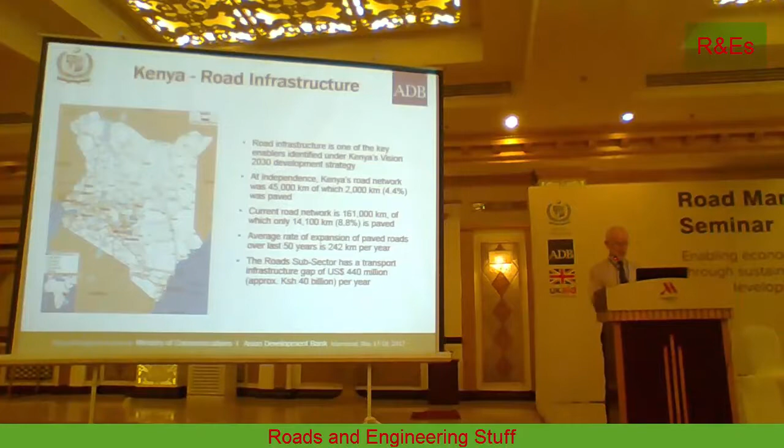When the current government came in, what's called the Jubilee government, its manifesto promised that they would provide an additional 10,000 kilometres of surface road in Kenya. Fair enough.

But the problems: 3 road agencies, they know where they are now, but they're having a devolution agenda, and they want to devolve the power to the districts, the regions and the districts. So the 3 roads authorities don't know their future, but they're having to implement long-term asset management planning. There's no maintenance standards. The emphasis is on projects. Let's not do maintenance, but let's do the projects to reconstruct the road.

Now, you'll see, a lot of this should ring with you about what happens here in Pakistan. What I've seen is no different.

Outturn costs are 50% higher than the engineer's estimate, and it was so bad that each year they would budget on the engineer's estimates, they put out the number of contracts to use up all the budget to find out the budget's overrun by 50%. Each project's overrun by 50%. So half the projects they wouldn't pay for this year and delayed the payment until next year. The next year they did the same thing until now there's a 6-year backlog in paying contractors. So contractors are already priced in the cost of borrowing for 6 years in each of the bids.

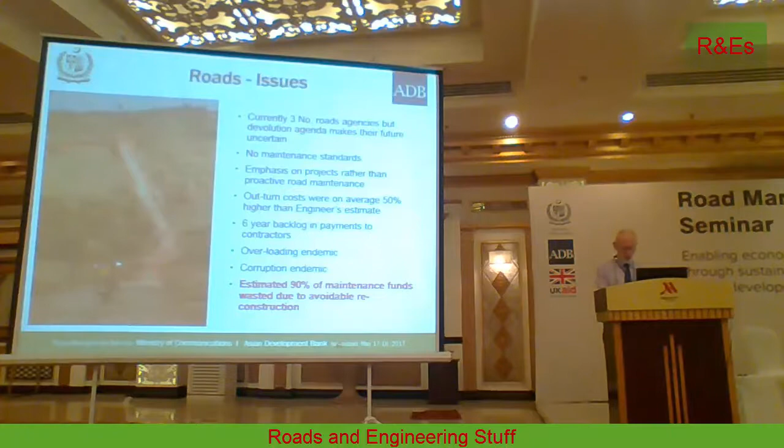So, we looked at, luckily in Kenya, we had 2 sets of data, 5 years apart, a few years ago. So we're able to look at what the asset value was, asset condition asset value was on the first year, and then look at it what it was in the fifth year and put a trend. And what became obvious, that because they're not doing maintenance, the asset was decaying at 6% per year.

I remember saying yesterday, the World Bank says you can link 1% investment in infrastructure to growth to GDP. So by the time you add in the cost of that 6% per year, plus the 6% lack of growth in GDP, the economic cost to Kenya of not doing road maintenance was 270 billion shillings a year, and 1 shilling is about 1 rupee. So it's a vast amount of money being wasted.

Public debt was 55%. So whilst the Jubilee Manifesto said we want to create 10,000 new roads, Kenyan government could not borrow money. IMF would not allow it to borrow any more money. So how are we going to reconstruct 10,000 kilometres road and with no council funds?

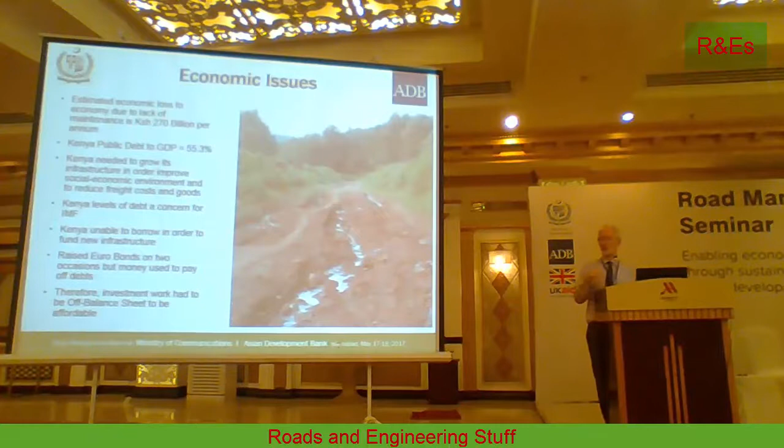So it was called the Kenya Roads Annuity PPP Programme. Forget about the word annuity, it's something we were handed with, it means nothing. The objectives were 10,000 kilometres of surfaced road over 3 years.

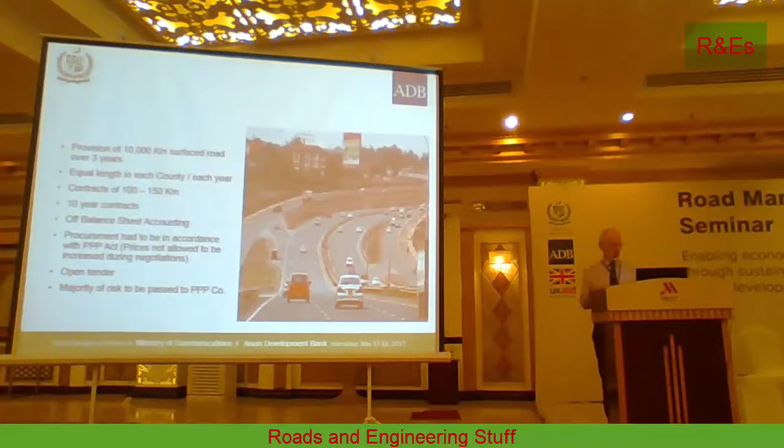Then the politicians got involved. They wanted an equal amount of road and an equal amount of money spent in each county each year. So we ended up with 4,000 kilometres being done each year, split into something like 30 lots, each tendered as a PPP separately. 10-year contracts - we wanted 17 to 20-year contracts, but the Treasury in Kenya felt the local banking market wasn't used to lending money for more than 10 years. The Procurement Act had to be followed, the open tender, and the majority of risk was passed.

So, reconstruction. These are the objectives we wanted out of the project: implementation affordable and sustainable, in other words we get the roads into a state where we can easily invest to match depreciation, and proactive management of overloading.

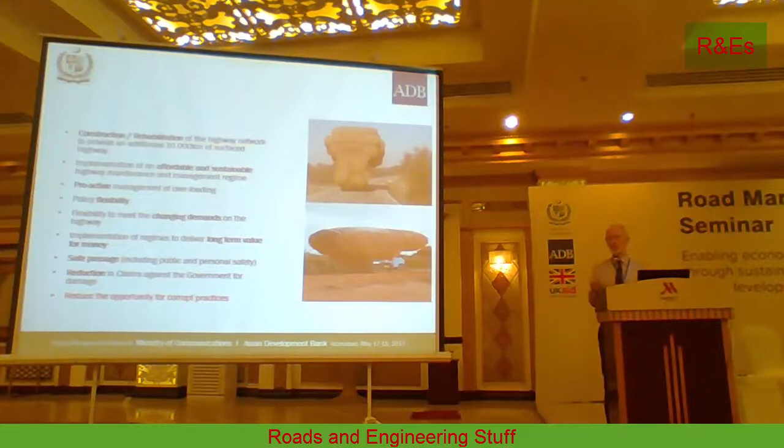We actually passed the overloading problem on to the contractors. And as Ian said earlier, it's not difficult - you tell what the amount of overloading is and the price point. Policy flexibility to meet changing demands of the highway, long-term value for money, safe passage, reduction of claims against them. And the subtext was the government wanted to remove all the opportunities for corrupt practices. That was why it went down the PPP route, because in PPP there is no supervision, it's self-supervised.

But there are other issues: policy flexibility, political control - the politicians wanted to be involved in everything. Strategic dominance - what the local market was scared of was international contractors coming in and taking over. But you have to remind them, there are no international contractors out there sitting with 10,000 staff doing nothing - they wouldn't be in business.

What you tend to find with international contractors is they bring in a management unit and then manage the local supply chain to deliver the project, and that's actually more work for the local industry than what they were seeing. There's long-term commitment, which can be good or bad depending how well you get on with your contractor. Then there's value for money, corporate governance, institutional weaknesses - there's no capacity inside the Kenyan government to do PPP, and capacity of local markets.

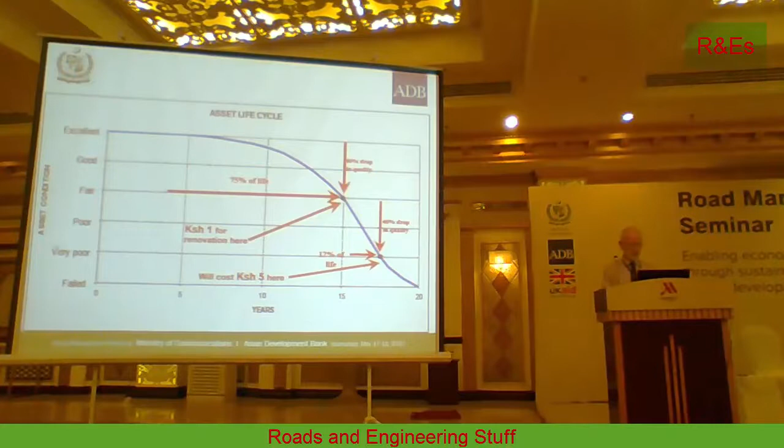If you look at it on a different scale, traditionally you let it decay 20%, you reinvest, and let it decay 20% again. But most roads authorities let the roads decay to the point of failure, and because it's a 1 to 5 ratio, when they try to invest the same amount of money as before, the recovery is only a fifth - so it's a never-decreasing circle. What this shows is to move to steady state, you need to change not only the way you procure, but how you deliver maintenance. It's a total change - just throwing money at it doesn't help.

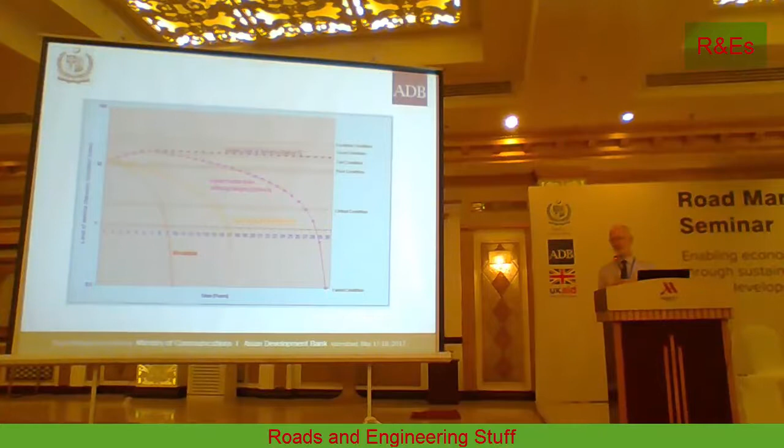Now, PPP and performance-based contracting is about delivering a level of service. So you've got to decide what your level of service is. And this is a question for you: do you want that? And that's not Pakistan.

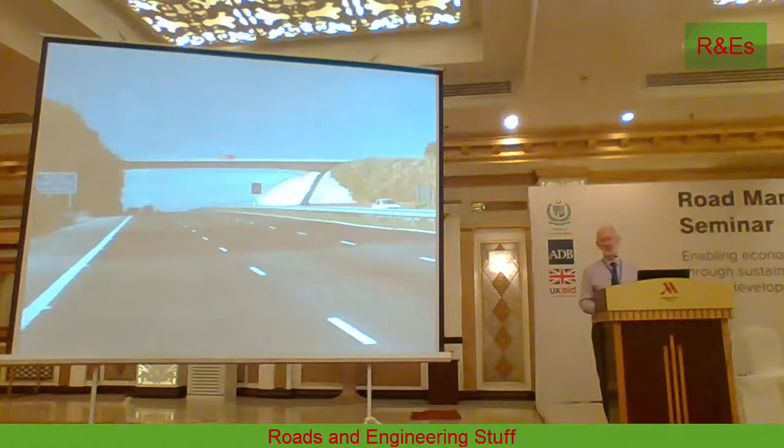Or do you want that? Who wants what? Who wants the first? No. And who wants the second? Somebody's brave enough to say that's what we like - that's what I have in my office in the UK. But neither is true. The first one is unacceptable. The second one is unaffordable. You have to find something in between.

So how do you determine the level of service? First of all, you've got to have a mechanism. What we did, we take 3 factors - there are 3 project objectives. One is about asset management, one is about safety, and one is about the visual condition.

These are all measurable. So we take, for example, SCI, Structural Condition Index. We take pavement strength and divide it into 6 bands, from excellent down to failed. Then we look at skid resistance and accidents - there's a relationship between wet weather accidents and skidding. So we do SCRIM as a normal survey that we do, and again divide it into 6 bands, excellent down to failed.

PCI, surface condition - we do visual surveys every year that pick up potholes, trips and all the rest of it, and scope it. So now we have 3 things, we add them together to get the pavement network condition index, the NCI, going from 30 down to 0.6. It's not linear, it's a curve. And the important thing is, it doesn't matter whether you agree with the philosophy or not, as long as you do it the same way every year.

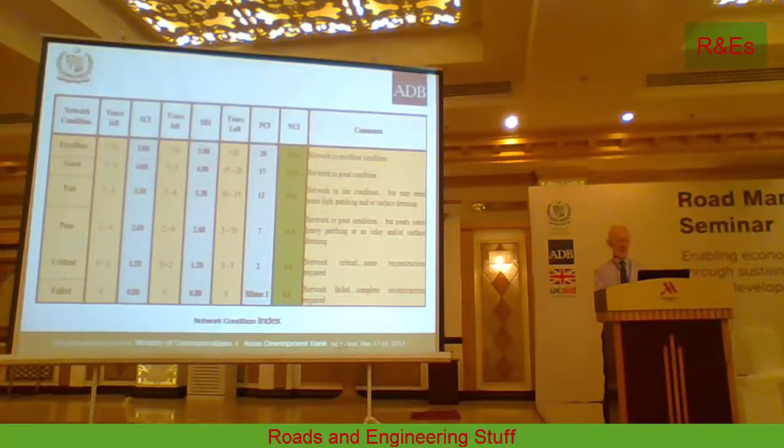So now we've got to decide what's the level of service we want. So we looked at 3 funding streams. We looked at the capital costs of building a project. We looked at the maintenance costs of running the project, but we also looked at the user costs - the cost of delay, the cost of pollution, the cost of accidents. For example, in the UK, we know that every fatal accident on the road network has an economic cost of 1.5 million. So we can look at the cost of serious accidents, and build up all these costs.

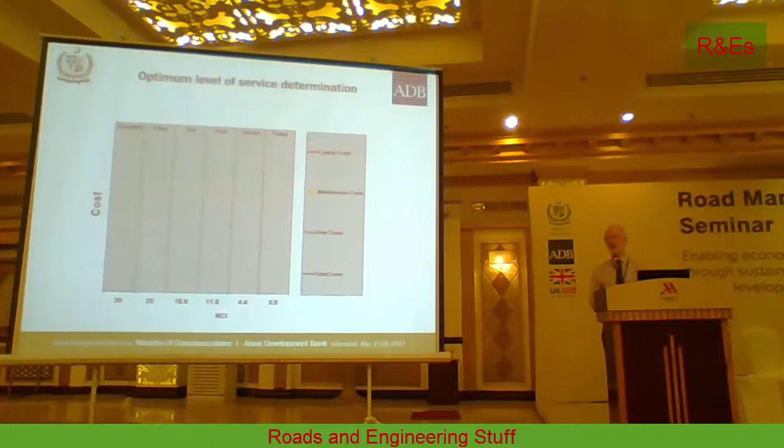So if we look at capital costs, as you'd expect, what we're trying to do is look at the cost of keeping the road in any of these 6 bands from excellent to failed. So capital cost: excellent condition, poor condition if we haven't spent any capital. Maintenance cost is the opposite way - we've just spent a lot on capital, it's new, requires little maintenance.

We haven't spent any capital, the road's in poor condition, it requires higher maintenance. User costs: high capital spend, good condition, fewer maintenance works, user costs are low because IRI is low, delays are low because there's no roadworks, accidents are low as well. But with no capital, poor condition, maintenance works going on, therefore delays, therefore cost, pollution, and probably accidents.

If we add them together, we get a curve. And the minimum is what we call the target level of service - it's the optimum between spending capital money in the network, cost of maintenance, and the cost of having the assets. And that becomes contractually our level of service.

So now we talk about specification. What is the specification? It's a methodology to deliver the project objectives. Now, one of the first things you do with any project is develop your project objectives. And usually the most difficult thing is to get the client to sit down and agree to 6 or 8 project objectives, because your payment mechanism, the specification, the contract documents - all should be designed to deliver the project objectives. It's your reference point for it.

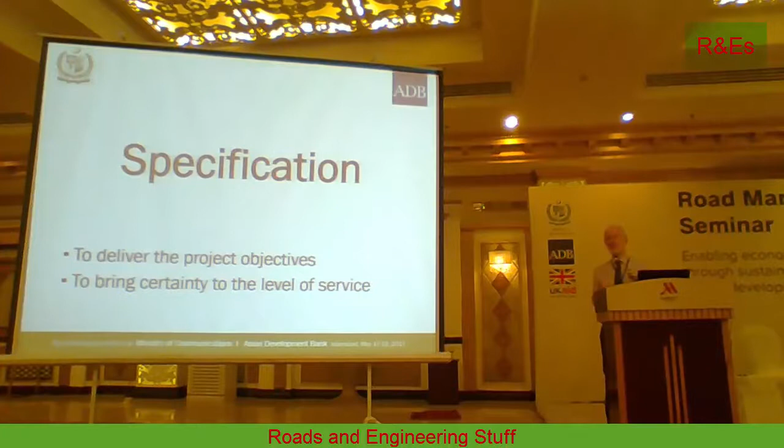So for Kenya, we have a major specification. No road section length shall have a residual life of less than 8 years. No road section length should have an IRI greater than 5. All bridges capable of carrying 40 units of HB loading, and the NCI shall not be less than 18.6. That's it, that's the major specification. And these are all really measured.

Then we have a minor specification: no potholes, no trips, no dark lamps, no puddles, accidents. The road after accidents should open within 30 minutes of being released by the appropriate authority, and 1 hour.

You might say not having potholes is impossible, because every road will have a pothole. But level of service contracts are not about the fact that the pothole is there, or the lights not working, or there's a flood. It's about how quickly you respond to it.

We did a survey in the UK asking the public how they measured the success of our roads authority, and we were surprised at the time - this was 20 years ago. It's not whether or not the asset is in good condition. What they were more concerned about was: we told you a year ago there was a problem and it's still not fixed. So their judgment of a good or bad highway authority was based on how you responded to knowledge. You can have all the money in the world and sort it, and still be rubbish in the public's eyes if you're not responding to any of the requests.

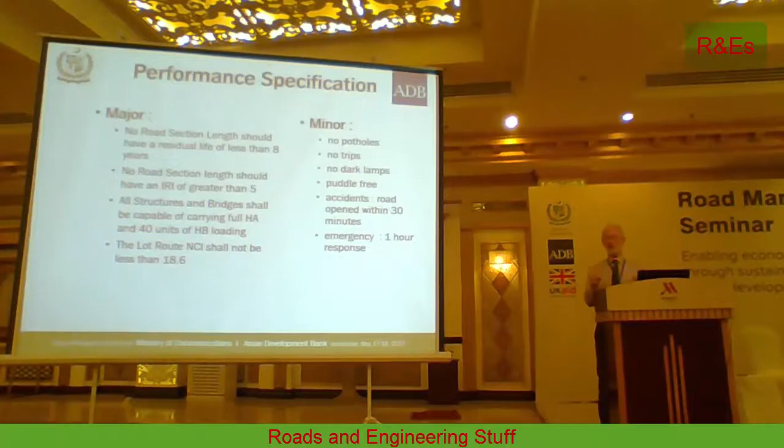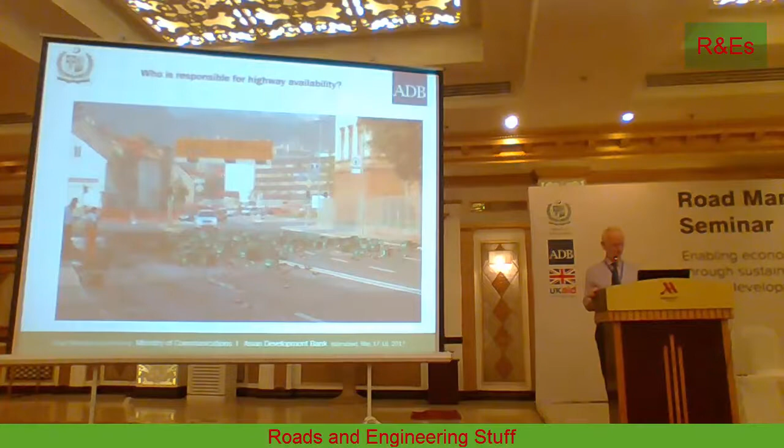So we developed a specification for this, and you could do it in half a page. But by the time the lawyers come in and ask you, what if this, what if that, what if this - you have to deal with all these what ifs. Who is responsible for this if you've got a performance-based contract, whether or not it's being paid? Who's responsible for that?

These are funnies, but they're actually reality. Because when you design your performance-based contracts, your PPPs, you must be imaginative and look at all the things that could possibly happen and deal with it, either in the payment mechanism, the output specification, or the contract document. If you don't, you've lost certainty of price because these become real claims. So you might as well deal with it now, set an effective price in the contract, then you can budget for it. You know what you're budgeting for - you cannot budget for uncertainties.

So moving on, we divided the specification into 3 performance standards. One for the construction rehabilitation period - these are all called brownfield sites, existing roads we need to widen and resurface, gravel roads at the moment. So performance standard 1 is entirely about typical PBC type role. Performance standard 2 is post-construction, forcing them to look after the asset's structural health for the length of the contract. Performance standard 3 is looking at operation and maintenance service delivery.

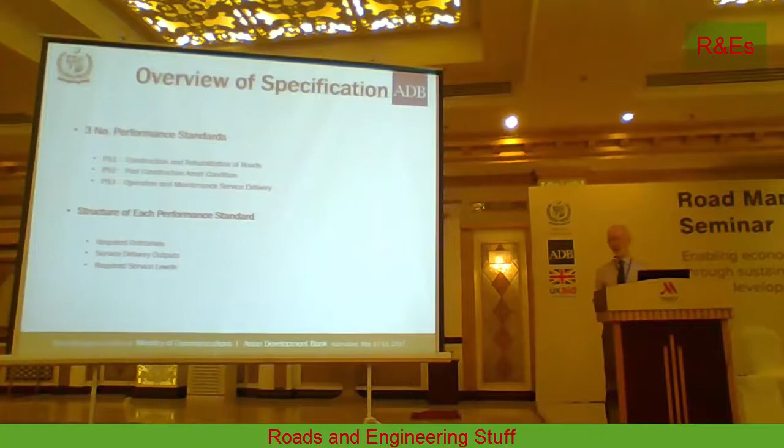Each performance standard is divided up into required outcomes - that's the objectives. They're not contractually binding, but in a court of arbitration, the court would look at it as to intent. Then there are the service delivery outputs and the required service levels. So let's look quickly at examples of what these might look like.

PS1, construction rehabilitation of roads, lists all the things we're responsible for - the design. All design shall be in accordance with the Roads Design Manual, and so on. And this shows how they're paid for it - we'll talk about the payment mechanism later. But what we gave, because each lot comprised a number of roads, not just one length of road - it might be 5 or 6 roads, quite separate apart - we had to give them benchmarks on each road, certain percentages complete at a certain time for all the different roads. So we did that in Matrix 4.

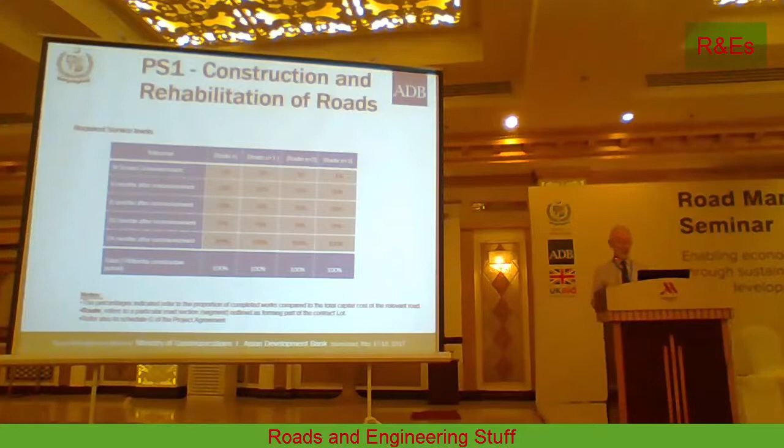Post-construction asset condition: no road section lengths with residual life of less than 8 years, and so on - you've seen all of that. What we're doing, the way we present this, is the specification has a direct link to the payment mechanism. You might not be able to read it, but look at the first column: you've got the defect, the residual life, and then the service level requirement - no road section length should have a residual life of less than 8 years. Rectification period is 3 months, so once they find it, they've got 3 months to sort it.

We also have what's called a moratorium, and you need to consider this when you're doing your PBC contracts. You can't expect a contractor to come in one day and overnight have sorted everything. He's going to inherit an asset that may not be in the best condition. You've got to give him time to sort things out.

All the moratorium means in contractual jargon is that even though the defect hasn't been sorted, he will not suffer any deductions because of it. So he's relieved from penalty during the 3 months, during the moratorium period. But after that, he will be hit.

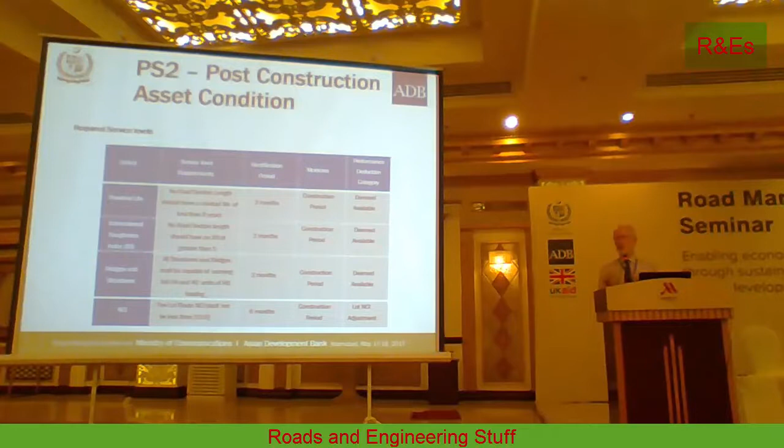Then operational maintenance standards - I won't go through that, it just sets out all the 24 hours to repair. And just to follow on what some of the other speakers said about not repairing things, they do repair things within 24 hours. If you set the contract right, that's not necessarily true, because what we've set in this contract is they must do a weekly asset integrity and safety inspection.

And then they log it. That's the official log of when a pothole happens. And if a contractor manages that well, he does a survey one day and sends a road crew to fix it on the same route the next day.

So it's manageable. It's not at any time - he has a specified time. If the pothole appears in between services, he does it in 24 hours once he's been told about it. So that's trying to be fair to the contractor.

So the operational maintenance is exactly the same format: what the defect is, what the obligations are, what the required fix time is, whether or not it's moratoria, and the link to the payment mechanism.

So the payment mechanism - what is a payment mechanism? Well, it brings certainty to the cost of providing a specified level of service. And one of the things I always advise, and I also do this in any form of performance-based contracting, whether it's traditional or PBC, there should be no such thing as a bonus.

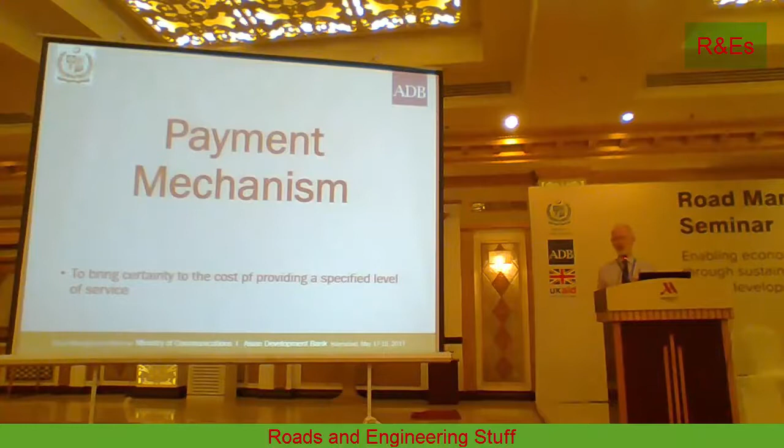There are 2 reasons. The minute you bring in a bonus, you bring in the potential for corrupt practices. Secondly, from a client's point of view, how can I budget for a bonus? If I had the money for a greater level of service, I would have specified it in the first place. I know I specified this because that's all I can afford, and I can't afford to bonus anything. So it's easy to keep it out.

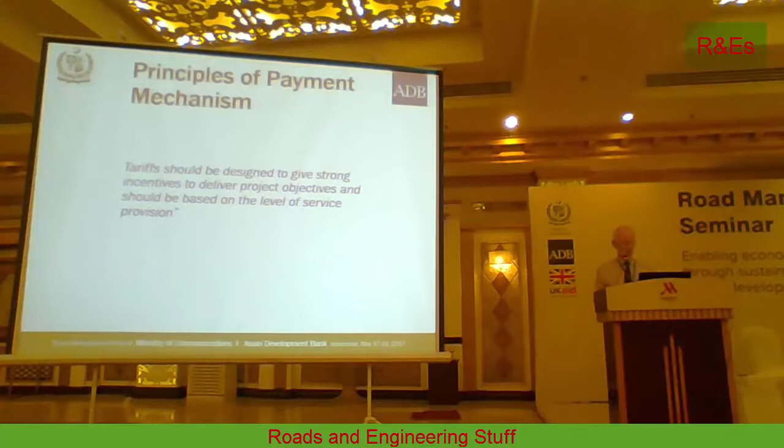One of the principles of a payment mechanism, no matter what form of contract it is, is that it should be designed to give strong incentives to deliver project objectives, which should be based on a level of service provision. So it's strong incentives.

It should not be a penalty, it should not be punitive. And in most contractual environments, the deduction you make, whether you call it a penalty or not, should reflect the cost to you. If it hasn't fixed a pothole in 24 hours or other time, you can't hammer on with a 1,000,000 rupee fine. It only costs you as a department, say, 10 rupees to go out and fix it. You would never win any court case, almost in any international court, on that basis.

So the deduction or penalty must reflect the cost to the local authority if, in the failure of the contractor, the local authority has to make arrangements to get it fixed. That's what's deemed to be reasonable.

And you also need to look at the level of deductions. Now, the standard way of doing this is you take a reasonable contractor acting normally - what level of deductions should you be able to expect? Normally you put that somewhere between 8 and 10% of his monthly or his annual fee. It should never be more than that, otherwise it's too aggressive. If it's lower than that, it's not enough incentive.

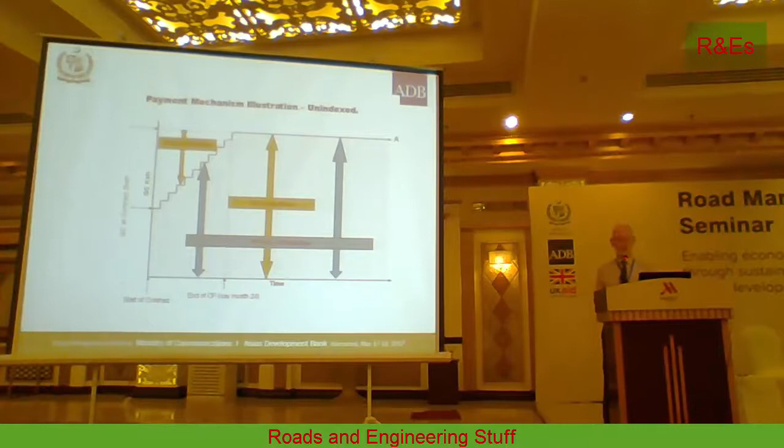And by the way, if you're the winning contractor, we're going to bind your method statement into the contract, so it becomes contractually enforceable. You promised you would do this, why are you not doing it?

Going on what others have said, in performance-based contracts everything must be measurable. But there are some aspects of road maintenance that are not measurable. For example, quite often I see 'room shall be painted in a nice colour.' How can you judge whether a room is painted in a nice colour? What's nice to me is not nice to you, so you drop it.

Things like vegetation, flower beds - you can't specify it, so don't have it in the specification. But what you can ask them is to tell us how you're going to measure your progress in ground maintenance, for example, in the method statement. And if we like that, then that's how you'll do it.

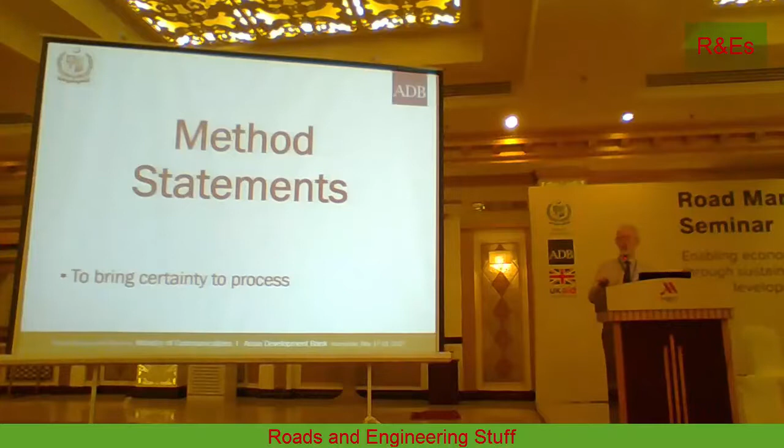So the method statement becomes their input to the contract. There were 7 method statements: mobilisation; design; construction, rehabilitation, operation, maintenance; plant, equipment, materials; health and safety; quality management; and demobilisation, transfer. The rules for the method statements are: there should be no sales pitch, there must be clear defined terms.

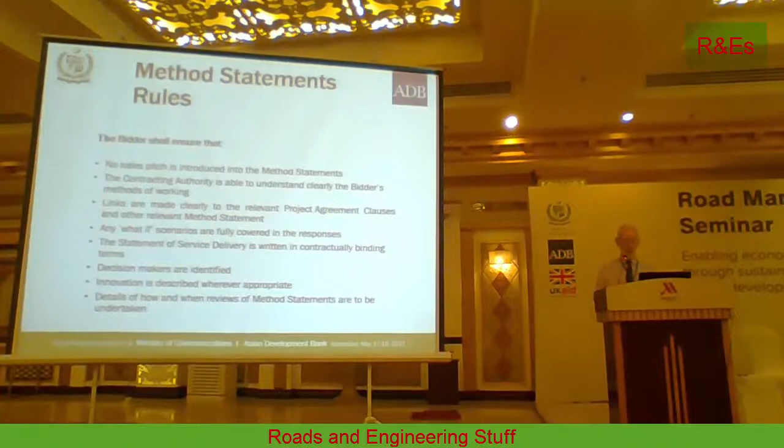So it's 'we will', not 'we may' - all definite terms that you can hold them to. Who are the decision makers? If you use innovation, describe the process, describe the system, and you do this for every line of the performance specification. As part of that, you provide a service delivery statement and programs and plans, so everything is covered.

We also ask each contractor to put in a RAMS system, and that RAMS system must connect to the Kenyan Government's system. All reports, the results of all surveys, which are done weekly, they'll specify the day they do it - might be Monday, Tuesday, Wednesday. Then 2 hours back at depot, they must have downloaded their files into the RAMS system, and the client can come through a back door into the system and audit. All record drawings, all service inspections, all condition surveys - everything is kept electronically.

Now the next 10 minutes we'll look at Scotland. Okay, so Scotland, and that's a picture of those that don't know what it looks like. 3,000 odd kilometres of road and an annual budget of 40 billion in Pakistani rupees.

From 1936 to 1995, all roads in Scotland were looked after by 32 local authorities, and I worked for one of these. We worked on a force account basis - we were client, and we had a road direct labour organisation, and what we call Section 8 outstations looked after the day-to-day maintenance of discrete lengths.

Then in 1984, the government brought in the Planning and Land Act. It was getting concerned about the costs of running roads authority or government, particularly those departments. Under the Planning and Land Act, we had to prove that we're providing value for money.

Something like 30% of our work - to do the design work in schemes, or even to do the build work - our DLO or the client had to bid against the private sector. So slowly they introduced competition into local government services. Suddenly we were no longer just government, we were government and the contractor bidding against the private sector.

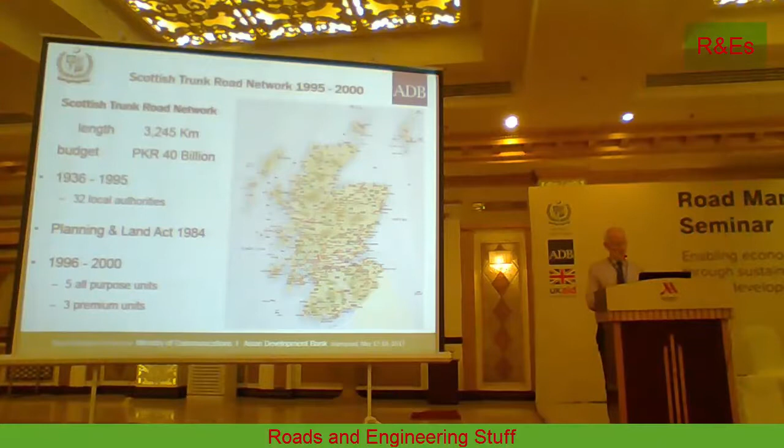I managed one of these units because as government, we actually formed a consortium of local government, with the private sector, and bid for it. So that's what it looked like. We had the Scottish Office as clients, we were the operating company, but discrete major schemes were tendered as normal.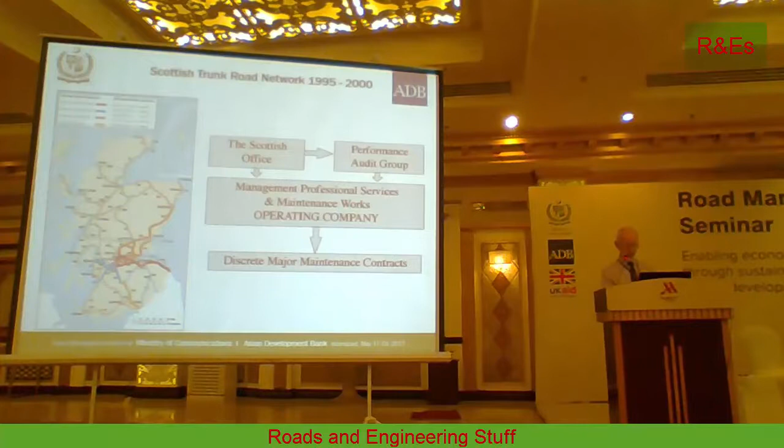Then we did the performance audit group. The scope of what we had to do was everything inside the road corridor - what we call a street scene. So everything fence to fence, everything within your boundaries, fell on us to do.

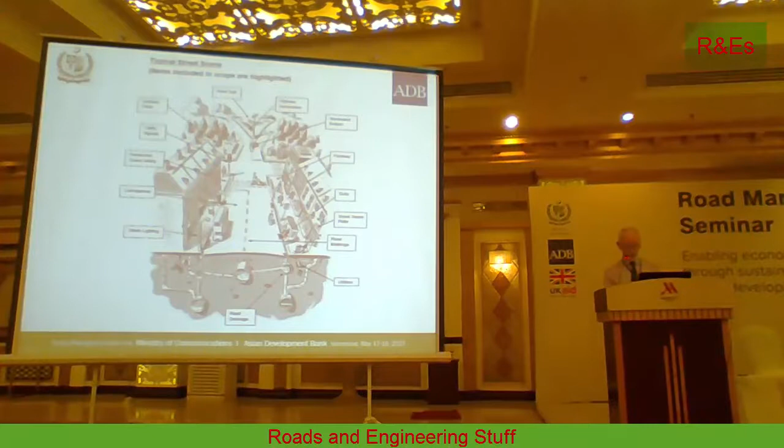So we were design and engineer, we did the routine and cyclic maintenance, network management, structural maintenance, winter, emergency, bridges, inspection, and we were the client's agent. We designed all schemes, and we had to get estimates within 3% of the outturn costs. If our estimates were wrong, we were penalised the difference.

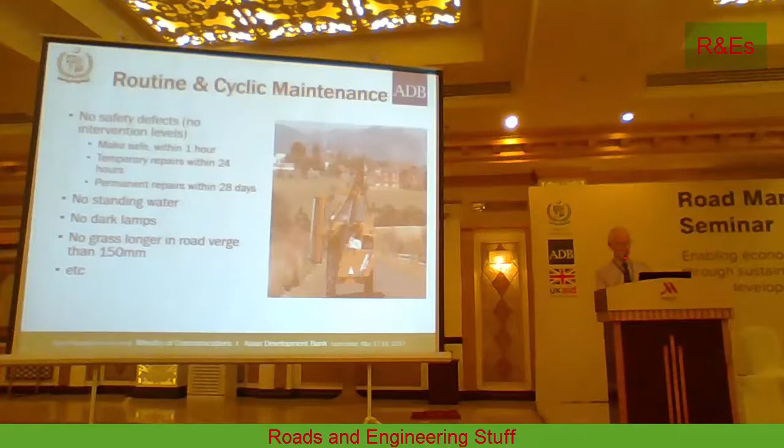Routine and cyclic maintenance was some performance-based contract - no potholes, no safety defects, no standing water. All the same as you see in a PBC contract. Traffic counting, accident analysis, claims management, traffic signal control - we had to do it all.

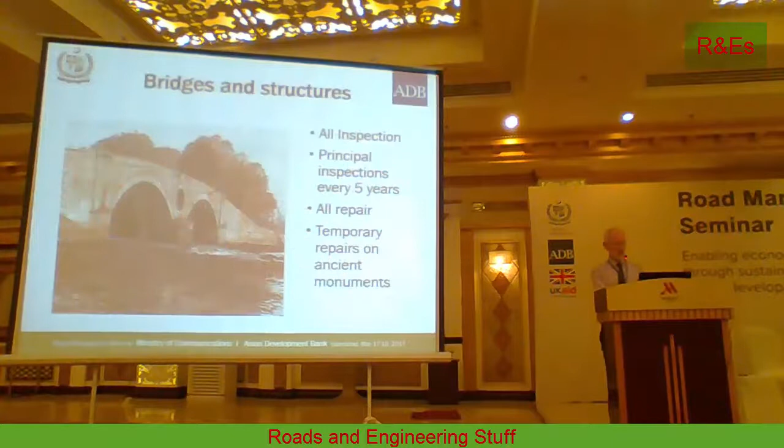Structural maintenance, identification schemes, winter maintenance, emergency response within 1 hour - made safe within 2. Then we had to wait for the client to make a decision about how he wanted to deal with it. Bridges and structures, all inspections, all temporary repairs. We had to do safety inspections, inventory, traffic counts, bridge inspections.

The important thing was we weren't supervised. We had to be self-supervised. We had to have a quality system without control.

Now, you might say allowing contractors to do their own thing is dangerous. But what I learned - we had what's called a performance audit group, who could appear at any time without notice, want to see your financial records, your technical records, your quality assurance records, they want to go outside and see the works. And if anything was wrong, you got fined.

And the fine was £10,000. You soon learned, after 1 or 2 times, the only way to avoid it was to do everything right all the time. It's a very powerful tool.

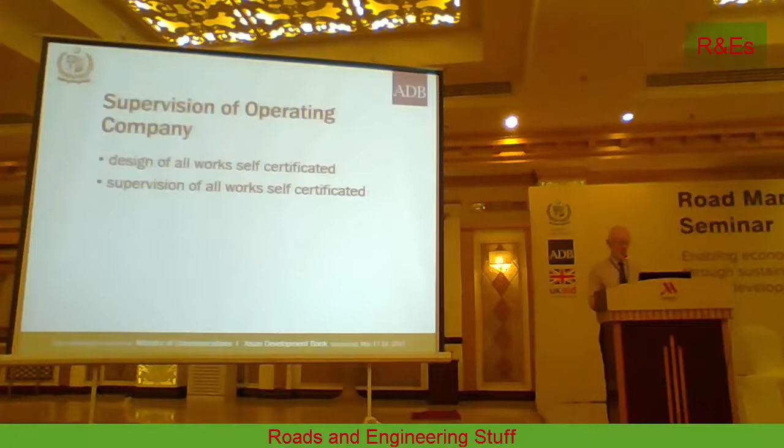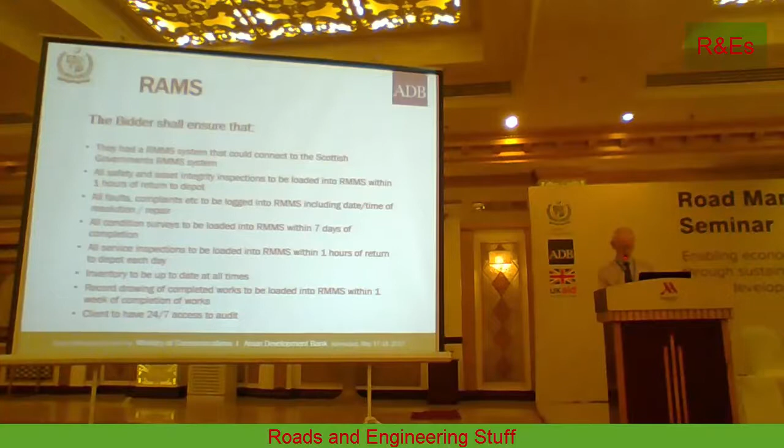We also had to put in a RAMS system - so there was no RAMS before that. It was completely new, so we worked with the Scottish Office to develop the whole concept and then put it in. Then we'd have a quality management system - all decisions, we had to record everything.

Payment mechanism for all these roles: for the design and engineer role, we got a percentage fee, but we had to have our estimates within 3% or we'd lose the difference. Routine and cyclic was a lump sum, network management was a lump sum. Structural maintenance, because of the uncertainties about what you had to do, was scheduled rates.

Winter maintenance was a lump sum with risk capping - so if the snow period went on more than 3 or 4 days, then we had scheduled rates. Emergency response was a lump sum for the first response, then scheduled rates for the repair. Bridges and structures, inspections - all lump sum. So it's a mixture of lump sum, performance-based contracting, and scheduled rates.

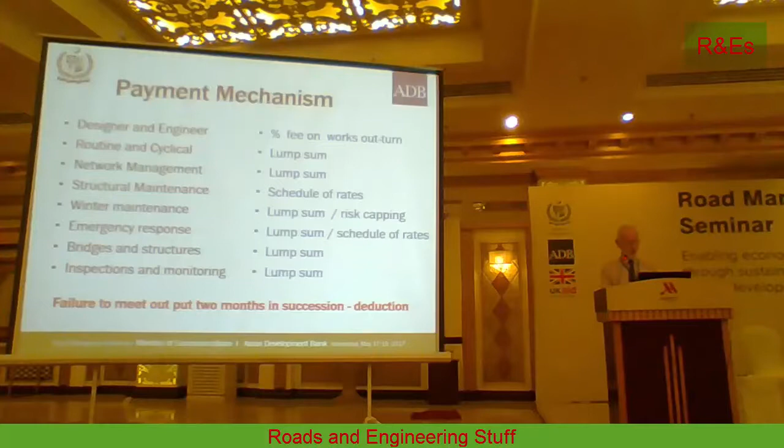And failure to meet output in 2 months' succession was another deduction. With the performance audit group, as I said, we made random audits.

The client's view after running the first few contracts for 3 years was it reduced costs by removing duplication. We started to look at things with a whole-life analysis, single-door approach, improved focus, efficient programming. Important thing is we reduced costs by 30%. We didn't do any less, we just reduced costs by 30%, so it provides value for money.

So they decided, rather than have 8 companies, they reduced it to 4, split costs into a quarter, moved them to 7-year contracts, and that's the way it still is today.

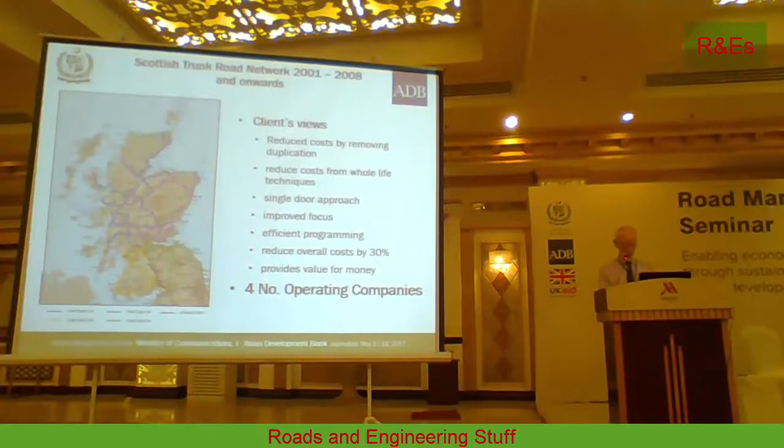So some of the issues - moving from traditional contracting to performance contracting - they're difficult to bid for, because we have no experience in estimating the quantities of what might be needed on an asset that we didn't know.

So you don't look at the work you have to do, you look at the resources you need to do the work. Will I need 50 men? How many rollers, how many of this, how many of that for the period of the contract? You work out your prices from that basis. If you've got to do 10,000 potholes or 1,000 potholes, you still need the one guy.

As long as you make contractual outputs, we have freedom - freedom to innovate, freedom to organise and manage resources, and freedom to organise our work the way that suited us. But the problem was, we soon discovered, whenever the client had a problem, they said, we've got a partnership, help me out, do something at no cost yourself. But then when you as a contractor have a problem, they said, oh, we've got a contract. So it's not exactly working in the spirit of partnership. And one of the things, even with your PBC contracts, they say once you sign up it's a partnership, put the contract in a drawer. If you have to open that drawer to look at the contract, the partnership has failed.

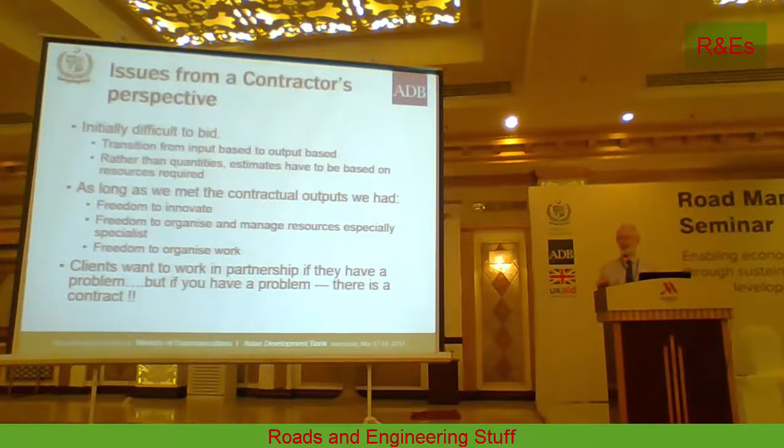Some of the other lessons in the last few minutes: we had a risk register, we had to build up a risk register to be able to price it, but the client didn't acknowledge or even understand what was meant by risk management.

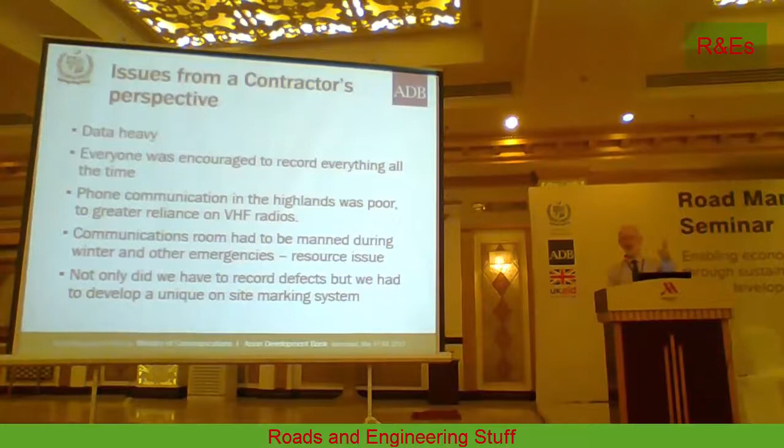All these contracts are data heavy. You're asking the contractor to collect a lot of data on a regular basis, and everybody is encouraged to record things all the time. The communications room had to go on all the time. But because we were out in a rural area, GPS in those days was early, so we had to develop a unique way of marking each defect, so you could explain, in the case of a court case, yes, it was definitely that defect I went to, not the one that's 5 metres away.

People ask me what should be the minimum length of a PBC or a PPP contract, and I always say it has to be longer than the design life. One of the reasons for that is PBC, any form of performance-based contracting, requires a cultural change inside the contractor as well as inside the authorities. So the contractor has got to train his operatives, he's got to buy new plant. If you have 1-year contracts, how is he going to recover the costs and still win the bid? So you've got to give him enough time to recover his costs, his new plant, his training, over 3, 4 or more years. Don't try to squeeze it into 1 or 2 - you're just going to make the bids unaffordable to yourself.

Proactive approach: you must make the decisions as a contractor in a PBC. You've got to make decisions about what you're going to do years ahead. You can't wait for things to happen - you've got to plan ahead and be ready for it.

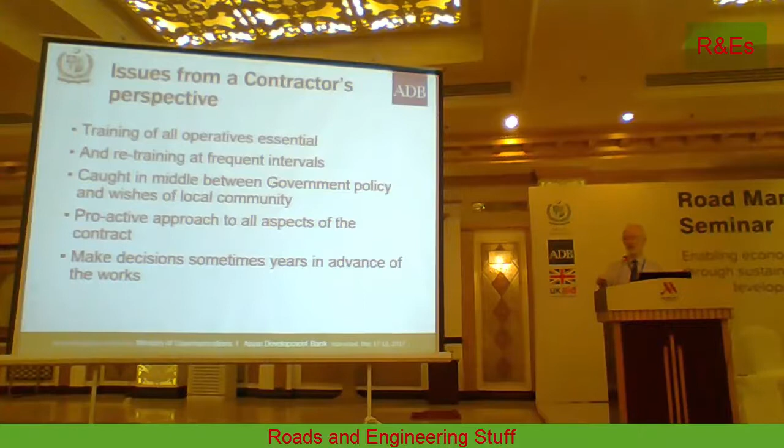So some of the lessons then. Kenyans doing the right thing, a lot. One good thing is they had an asset management problem - they couldn't spend capital, but using PPP to deliver asset management was the right thing. How they went about it left a lot to be desired.

Project lengths were too short, and this goes for PBC as well. Look at your project length, because whatever the project length is, the contractor will have a certain amount on it. Whether it's 5 kilometres, 50 kilometres or 500 kilometres, there are depots that are made. If you have it too short, that same overhead's there, but it's spread over a smaller quantity, therefore its rates are going to be a lot higher. So take advantage of economies of scale to make it as long as possible, say between 150 and 200 kilometres.

Always make it longer than the life of the asset. If you've got a pavement with a design life of 10 years, make it 12 years or 15, so that it becomes a timing risk rather than a doing risk, and you don't get handed back something that needs you to invest money immediately.

The other problem is the government must be able to give timely responses. Once you get into PPP or any form of project finance, you've got very expensive lawyers sitting in a room, and if they ask you a question, you can't say, well, I need to ask the president, and we'll get back to you in 3 weeks. They will just walk. You have to delegate responsibility to the negotiating team to make decisions there and then. You want an answer there and then.

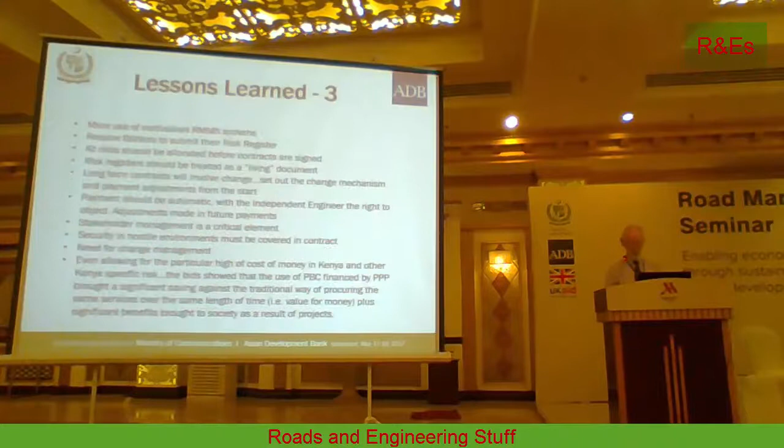Outputs must be objective and measurable. The last one: more use of centralised RMMS systems.

Also, for the tender returns for your PBC contracts, ask for method statements, ask for a financial model, and ask for a risk register. Because when it comes to claims, the risk register can be a valuable tool to say, you'd already identified this could be a claim, and by the way, I noticed you've mitigated against that by including the risk in your price. So always ask for the risk register.

You've got to make sure when you price the contracts, you're absolutely sure who is taking the risk on security. Is the government going to provide security and have a budget for it? Or is the contractor supposed to provide security, but he must have the money in his budget? That is a big ticket item - the cost of security in some of these projects is more than the project itself, because it does mean the road is lined with troops while working for the whole period.

The National Highway Authority of Pakistan, the government of Pakistan, has a vision to substantially increase the road density in Pakistan, and the government has set a mammoth target for development. This is not possible without the support of the private sector, which is one reason NHA has planned to undertake a major portion of highway development and maintenance through financing from the public-private partnership.

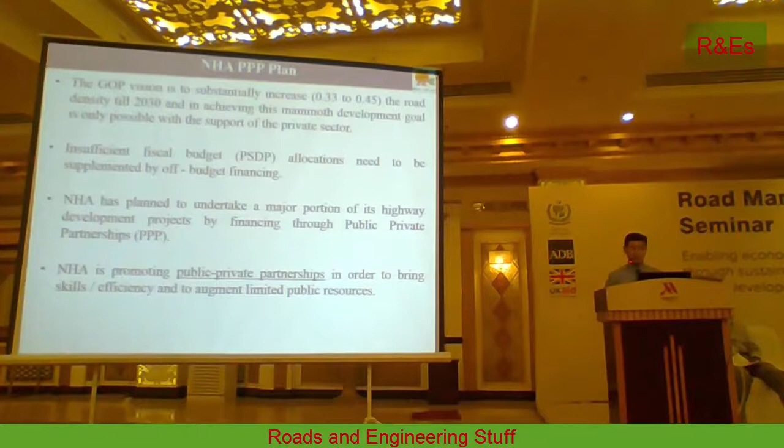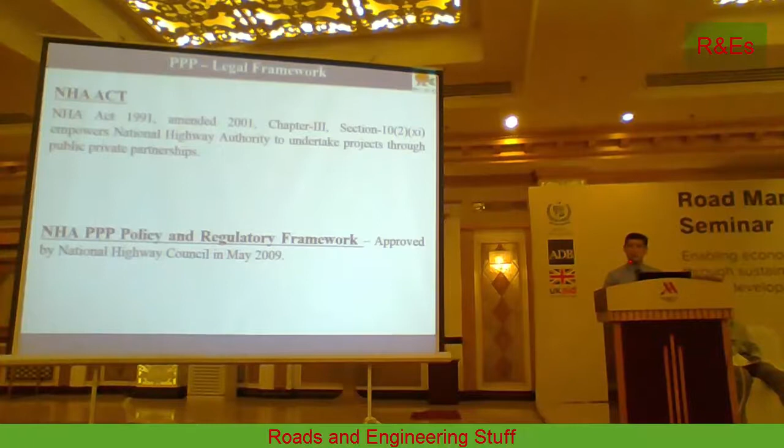NHA is promoting the PPP in order to bring skill, efficiency, and to augment the limited public resources. The PPP of NHA is being supported by the legal framework. NHA has an act which clearly defines how they can do the PPP, and NHA has also devised a PPP policy which defines the rule of business, how the project has to be made, structured, advertised, and procured.

NHA has created the biggest PPP regime, I think, in Pakistan. The total network of NHA is about 13,000 kilometers, out of which the motorway network is about 2,300 kilometers, including under-construction or already constructed motorways. The PPP has taken up the motorway network of about 582 kilometers.

This is already under implementation, and 300 kilometers of the motorway is under procurement, and another 231 kilometers is coming in upcoming projects. So about 50% of the motorway network of Pakistan is planned or under implementation through the public-private partnership.

In financial terms, the projects under implementation on PPP by NHA are about 137 billion, another 274 billion projects are under advanced procurement stage, and about 100 billion more projects are upcoming.

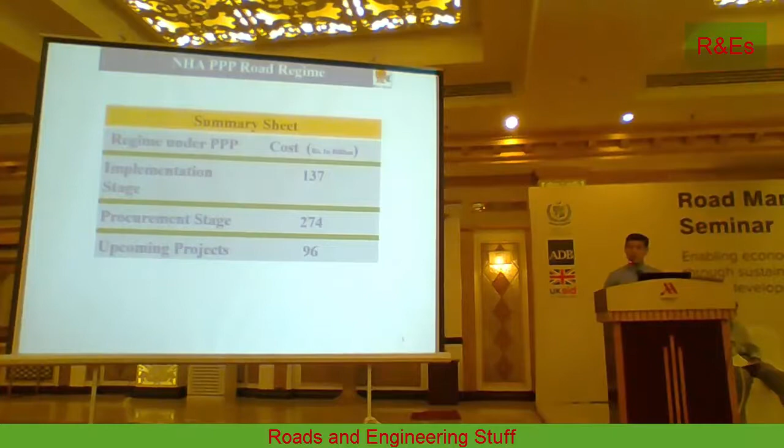Coming back to my case study of Lahore-Islamabad motorway, which is M2. The M2 is 357 kilometers and it was planned as a 6-lane motorway. This 6-lane motorway was completed in 1997 by M/s Daewoo of Korea. The construction cost of the project at that time was about $1 billion plus.

The project completed its design life in the next 10 years, and NHA then planned in 2012 to do the overlay and rehabilitate the project. Accordingly, they advertised the project and started commencement in January 2015.

NHA took a strategic decision to adopt public-private partnership for the M2 rehabilitation and improvement. The objectives set for the project are to improve ride quality, modernize the motorway, free up resources and generate additional revenue for the authority, and manage risk in terms of time overrun, cost overrun, etc.

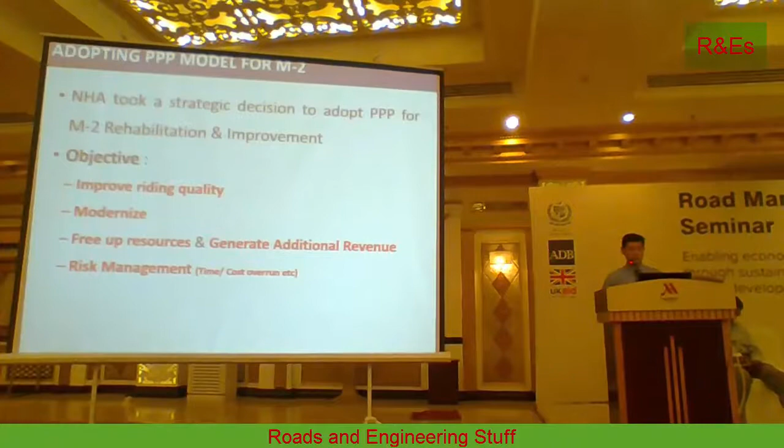This is a typical structure of the PPP project financing adopted by the National Highway Authority. The concession period is typically 20 to 25 years. Initially, construction is done in 2 to 3 years, and then we have the operation and maintenance period. During that operation period, we expect 2 overlays after about 10-year intervals, one in the middle of the project and one before handover.

During that 25-year concession, whoever is the concessionaire has to do the debt servicing, and there is a post-debt servicing period also. So we have an overall project cost. Whoever is the concessionaire is responsible for the design, construction, maintenance, and operation of the project.

For financing that project cost, we have the concessionaire, who has to finance that project, and the second part is the government, which either has to provide a subsidy to the project or expects some revenue from it. From the concessionaire financing part, it could be equity which the concessionaire has to put from its own pocket, and the other part is raised from commercial loan financing. The third part is the government either providing a subsidy or earning something from the project.

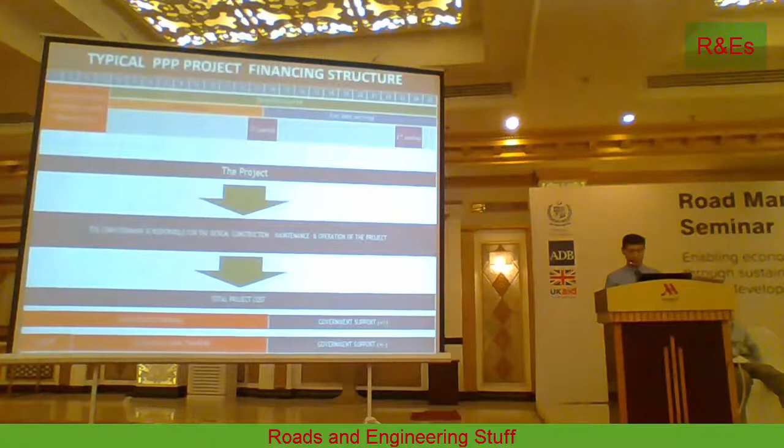This is a typical project cycle that PPP adopts when we advertise the project internationally in the newspaper. Then we have to devise a request for proposal document and bid preparation. We have standardized the concession agreement and the bidding documents. Within that bidding document, we have specified the performance indicators and performance specification, which shall be covered in the second part of the presentation by my colleague Dr. Aasim.

After we receive the bids, we have opening and evaluation of the bids. Once we have a successful bidder, we issue a letter of intent or letter of support, whoever is the successful bidder. Then we have a process of negotiation and award. After the negotiation and award, we give about 6 months for the concessionaire to do the detailed designing and the financial close. After the financial close, he has to do the construction, and after construction, we have the operation and maintenance period.

For the case of the Lahore-Islamabad motorway, these are the key features of the bid. We set the concession period for 20 years. Within the 20 years, the concessionaire has to do the construction, meaning overlaying the rehab of the project for 3 years.

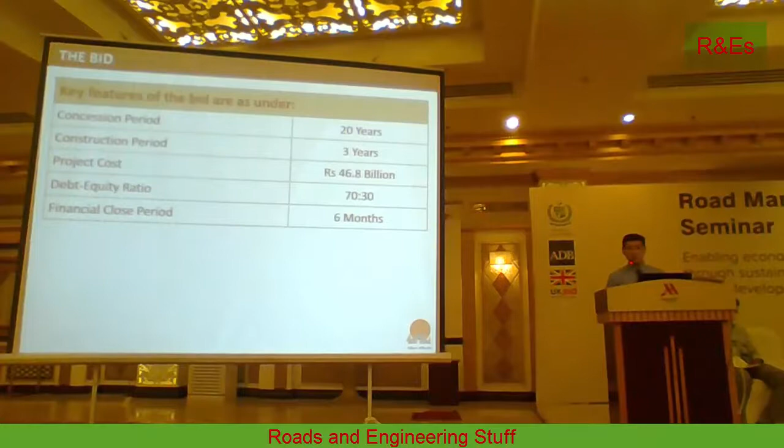The project cost was about 46 billion. From that 46 billion, 30% the concessionaire has to put from his own pocket, and 70% he has to raise from the commercial bank. We expected a great sum of money for the government also in this project. Then we set the standard for the toll rate, what is the toll rate during the construction phase and during the operation phase, and also the toll escalation factors.

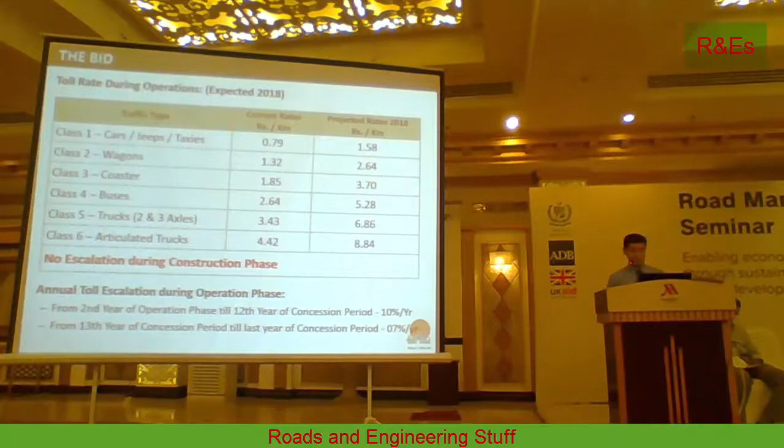This is the typical risk matrix of the PBC which we have adopted for the M2 project. The concessionaire shall be responsible for the cost overrun, and he is also responsible for the time overrun, and he will do the design and the construction. He is responsible for the design risk and the construction risk. In case of change in law, that is retained by the NHA or the government of Pakistan, and the concessionaire is responsible for the operation, also taking up the operating risk.

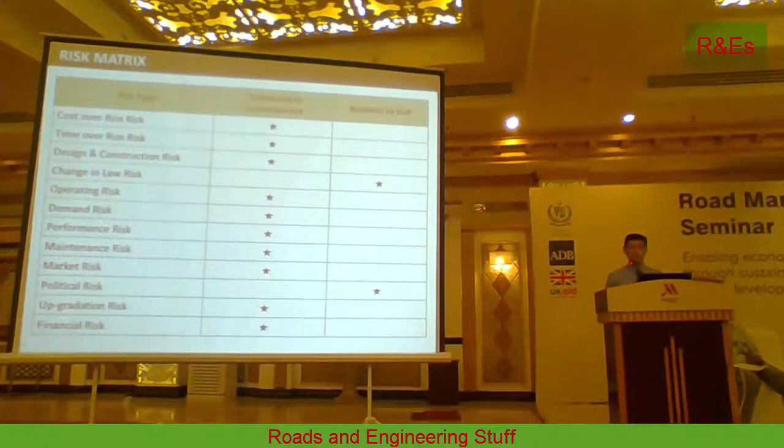In case of demand, the projected traffic that is going to come on the project is also retained by the concessionaire. The performance and maintenance of the road is also transferred to the concessionaire. The political risk, nationalization of the project, is retained by the government, and also the force majeure risk is retained by the government. The concessionaire is also responsible for upgradation and financial risk if any.

This is the typical structure that was adopted for the Lahore-Islamabad motorway. The FWO was the sponsor of the project, and made a SPV, special purpose vehicle, for this project, which is called MORE. They have a shareholder agreement, and with NHA they are tied through a concession agreement and a loan agreement. These are the banks which have provided about 26 billion rupees in this project. This SPV then has a construction contract with the FWO, and they have subcontractors also.

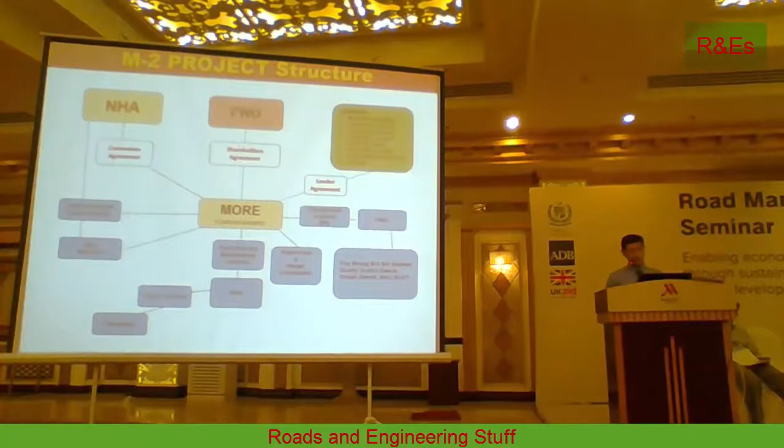For the case of performance, we have this mechanism of joint auditor and quality assurance inspector, whereas the concessionaire has their own supervision and design consultant also.

In terms of overall benefit of the project, the project is already in the operation phase. The concessionaire has completed the improvement of the project, doing the overlay of the whole project. In terms of the benefit reaped by the National Highway Authority, the concessionaire has done the rehabilitation and modernization of M2 at no additional cost to the government of Pakistan. The construction was done in half the time, and there was no cost overrun.

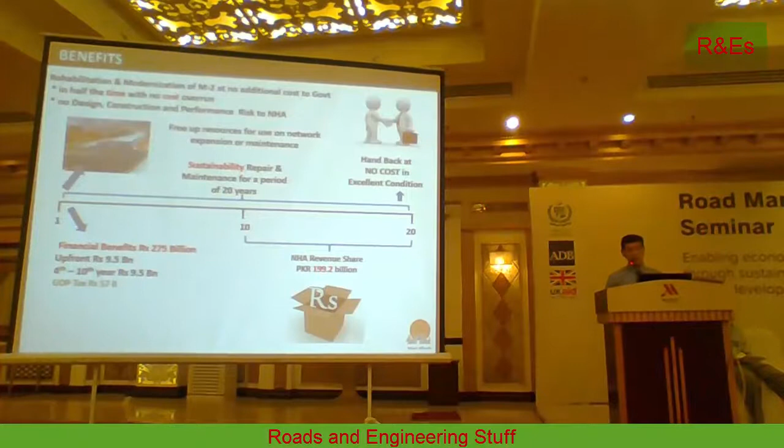There was no design, construction and performance risk to the client, and the money the government had to put onto the project has been freed up for other sectors, like social and other things. We have also got a financial benefit of 275 billion, out of which 19 billion is upfront money, and then we have a revenue share of about 200 billion rupees also. For the next 20 years, NHA is free from the maintenance and repair of the project, and the concessionaire has to hand it back at the end of the concession period, 20 years, in excellent condition.

Now we can go to the second part of the presentation. I will ask Dr. Asim for the performance indicator used in this project.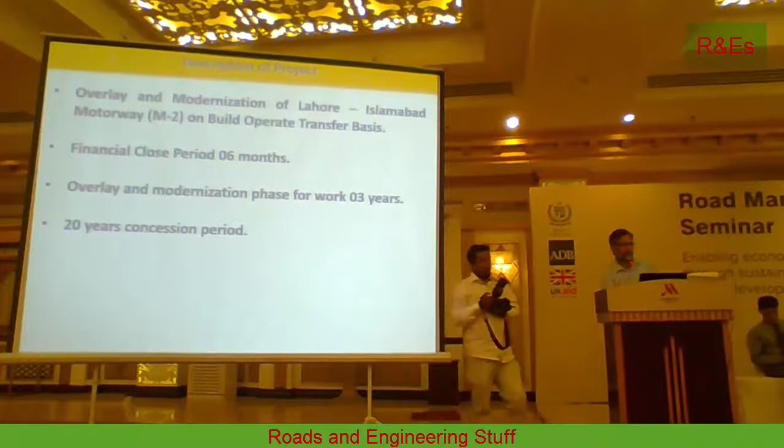So the contract for the overlay and modernization of the Lahore-Islamabad Motorway on a build-operate-transfer basis, or rather a rehab-operate-transfer basis, commenced in January 2015.

Now the timeline for structuring this project: after signing of the concession agreement, the financial close period was 6 months, and the overlay and modernization phase of work was 3 years, which you can also call the construction phase. So the total concession period is 20 years, out of which 16.5 years is for O&M.

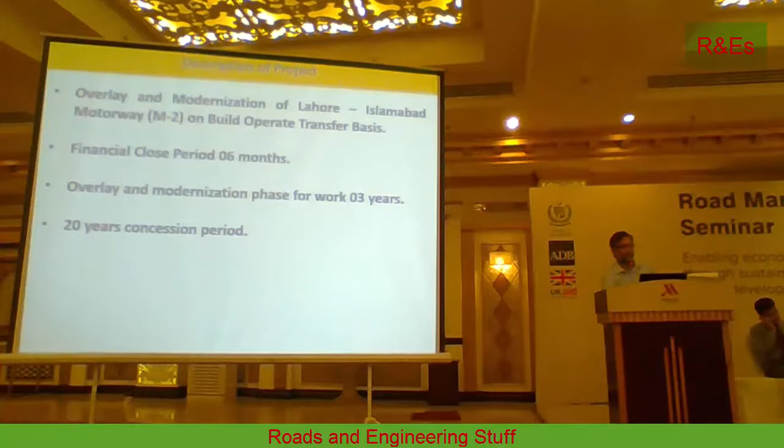Let's discuss the salient features. The most significant and critical salient feature is overlay and modernization during the construction phase. That modernization includes the intelligent transportation system, safety measures, traffic operation management, and accident reduction management, etc. Secondly, the structures and existing project assets shall be inspected and defects shall be remedied.

Service road fence and other features will be improved. Toll plazas and approved ancillary facilities will be provided. The project asset will be efficiently operated and maintained. Finally, landscaping and tree plantation for environment-friendly highways.

Now coming to the types of specification. Before discussing performance indicators, we need to understand method specification, result specification, and performance specification. The method specification, as the name tells, is the procedure for the activity of highway construction.

I'll give an example from the construction side: if there's an embankment, there's a 35-ton sheepsfoot roller, the thickness of the layer is 15 centimeters, and the minimum number of passes required is 8. That is the method statement.

In the result specification, the contractor has the liberty to use its own method. An example of result specification from the hot mix asphalt side: 97% of the GMP, that is the result.

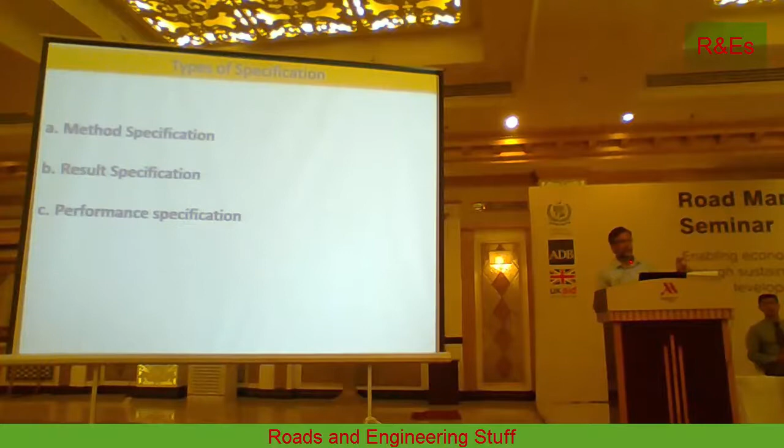An example of performance specification: if 1 million axles pass on the road, there will be no fatigue cracks, or the rut depth will be a maximum of 6 millimeters. That is about the performance specification.

In the Islamabad-Lahore Motorway, we divided our performance standards into 3 types. First, the construction performance standard, just after completion of construction. Second, the O&M requirement during the operation and maintenance period. Third, the handback requirement, for when the concessionaire hands over the project. These are the 3 types of performance standards we've made.

We cover 5 components: pavement including shoulders, drainage, roadside facilities, structures including bridges and culverts, and ancillary works like guardrails and pavement marking. Due to time limitations, in this presentation we will only discuss the first 2: pavement including shoulders, and drainage. Now let's talk about the construction performance standards.

The first one is the International Roughness Index, in meters per kilometer per lane, that is the smoothness of the profile, and it should be less than 1.5 meters per kilometer per lane.

Then we come to potholes and depressions; the minimum requirement is nil after the construction phase. About slopes for the pavement and shoulder, it is as per the approved detailed design, because in a straight section we normally have 2% on the pavement and 4% for the shoulders, but in a curved section we have a super elevation. That's why we wrote it as per the approved detailed design.

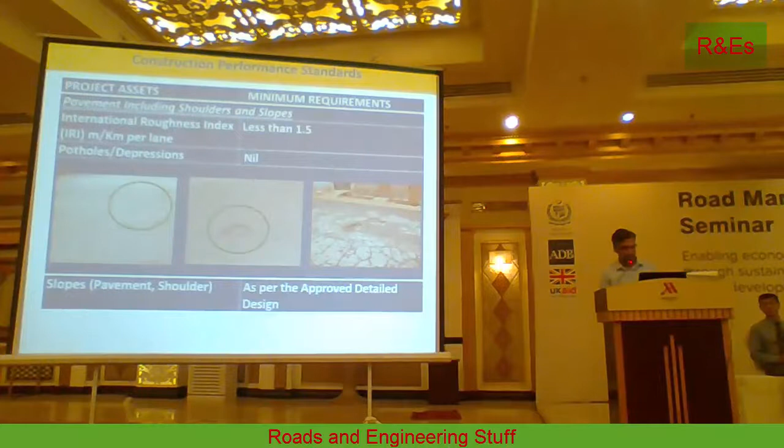Structural cracking, that means fatigue cracking under repeated loads, the minimum requirement is nil. For rutting, that is permanent deformation, caused mainly because of two reasons: weak subgrade or weak mix design. That is also a minimum requirement of nil.

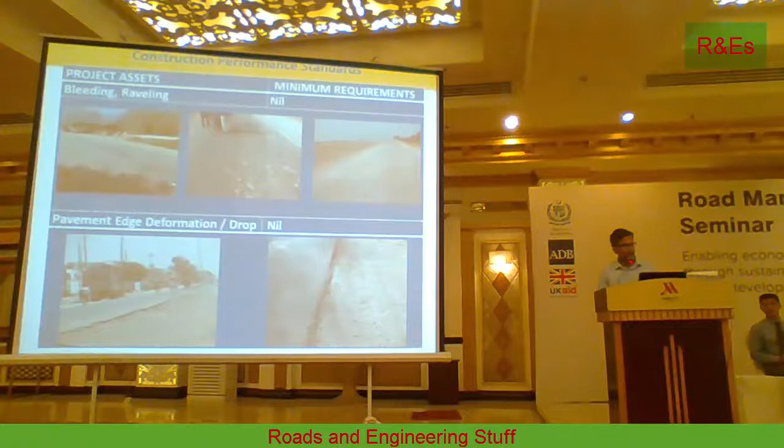Then bleeding and raveling. Raveling is the disintegration of the asphalt and aggregate, minimum requirement nil. Pavement edge deformation drop, minimum requirement is nil.

Coming to the paved shoulders, there will be no reverse slope, no drop off, and width as per the approved detailed design. Importantly, regarding the New Jersey barriers, in case of overlay without milling of existing asphalt concrete, the New Jersey barrier needs to be lifted to safeguard its safe serviceability.

This is obvious because if we are doing an overlay, we have to lift the height of the New Jersey barrier. Skid resistance is also an important criterion, and we have the criteria for the sideways force coefficient routine investigation, with coefficients mentioned in the RFP, that is 0.35 minimum.

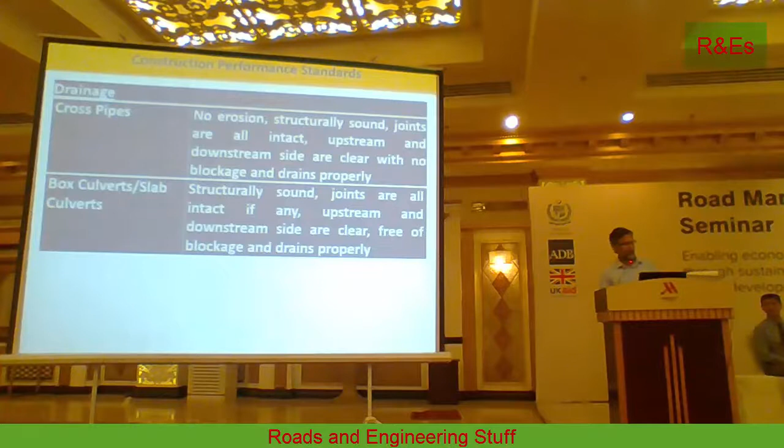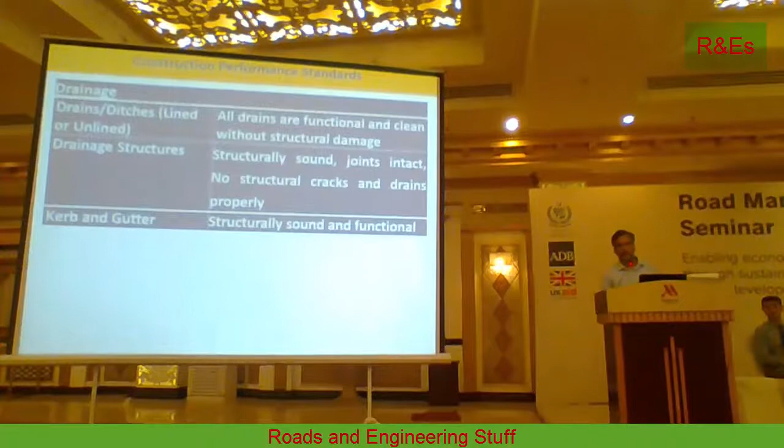We also include performance indicators for drainage, that is cross pipes, box culverts, slab culverts, drains, ditches, drainage structures, and kerb and gutter. So all drains should be functional, clean, without any structural damage. That is the performance indicator for drainage structures.

This is also an important O&M requirement, and these performance indicators we developed and introduced for the first time in NHA in a PPP mode project. The first one is the type of asset, that is the paved lanes.

Now what is the outcome? It should be smooth, safe, with adequate skid resistance and durable. So the third one, which is important, is the performance target.

What is the performance target? The percent of asset that shall be in the outcome described condition. So IRI should not be greater than 3.5 meters per kilometer per lane, especially for the O&M requirement. Because for the construction phase we need an IRI of 1.5 meters per kilometer per lane, but in the O&M requirement we increase that to 3.5 meters per kilometer per lane.

Now these are the tolerance criteria during the operation and maintenance period. Ruts not more than 10 millimeters, no structural cracks, non-structural cracks between 2 millimeters to 6 millimeters, no bleeding and raveling, no edge deformation greater than 100 millimeters. So these criteria are now, you can say, not very tough.

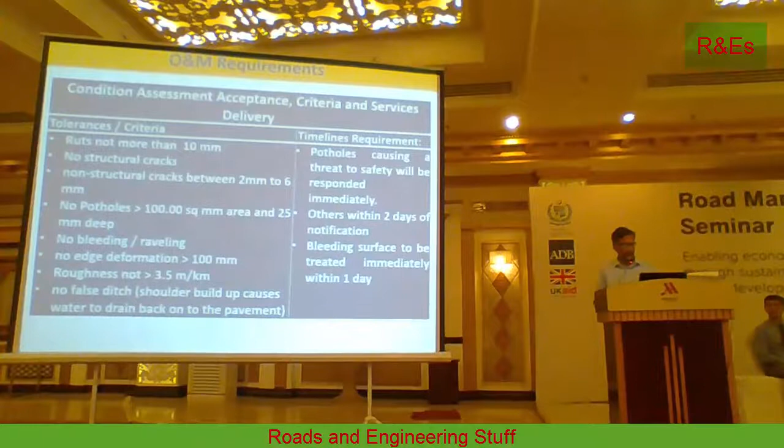You have to allow them to basically work during the operation and maintenance period. Timeline requirement for potholes: because a pothole can be a safety hazard, it needs to be repaired immediately, and other distresses within 2 days of notification. Bleeding of the surface is to be treated immediately, within 1 day. So we also mentioned these timeline requirements in our contracts.

Finally, when the project is handed over back to NHA, we also prepare performance indicators for the handback requirement: concession area clearance, and the concession area project assets shall be free from debris, surplus material, or leftover construction material.

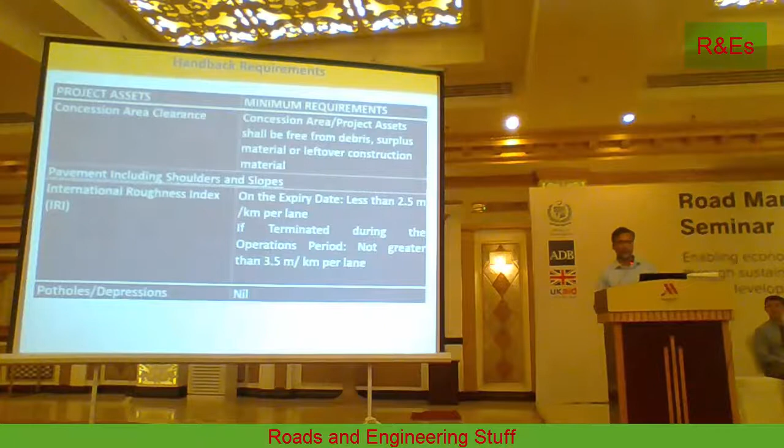At the handback time, the international roughness index is 2.5 meters per kilometer per lane. But if this terminates during the operation and maintenance period, then the IRI is 3.5 meters per kilometer per lane, the same IRI we use in the O&M period.

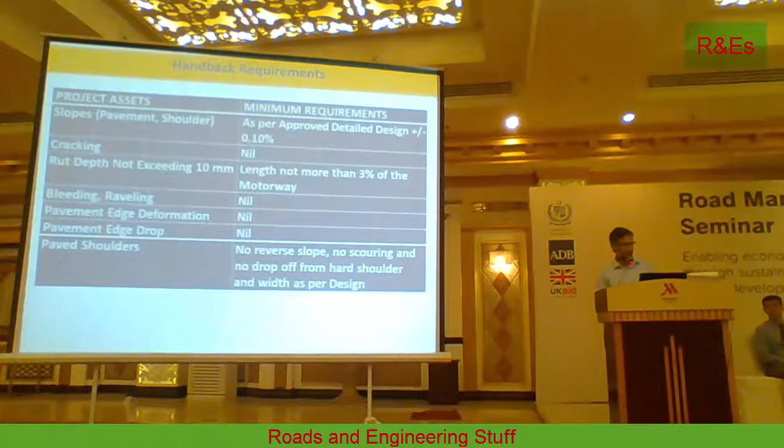Potholes, cracking, raveling, pavement deformation, and pavement slope - minimum requirement is nil. For the slope we give a tolerance of 0.10%, and for paved shoulders, no reverse slope, no scouring, no drop off from the hard shoulder, and width as per design.

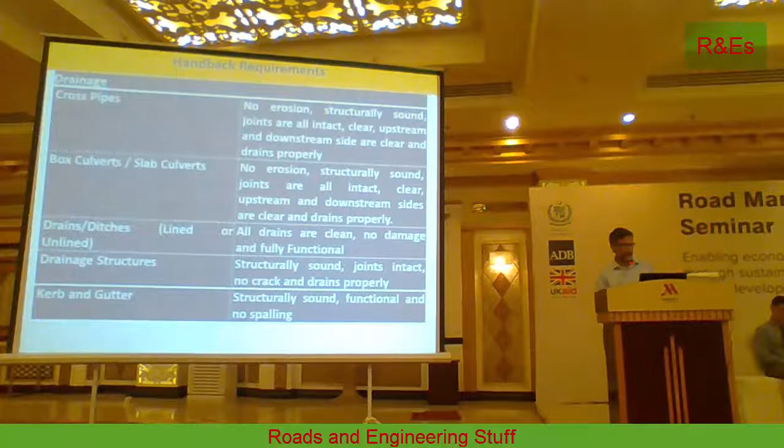Similarly for the drainage structure, as we already discussed regarding the construction performance indicator requirement, we also prepared these performance indicators for drainage.

Thank you very much, sir.